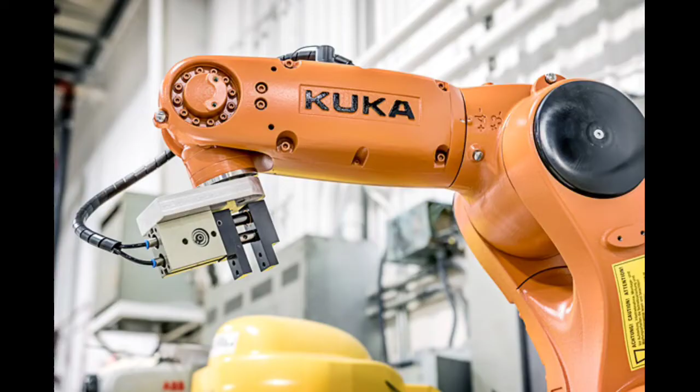Let's continue from the manual mode. Manual mode is the mode for setup work. Setup work is all the tasks that have to be carried out on the industrial robot to enable automatic operation. Setup work includes jog mode, teach, programming, program verification. The following must be taken into consideration in manual mode.

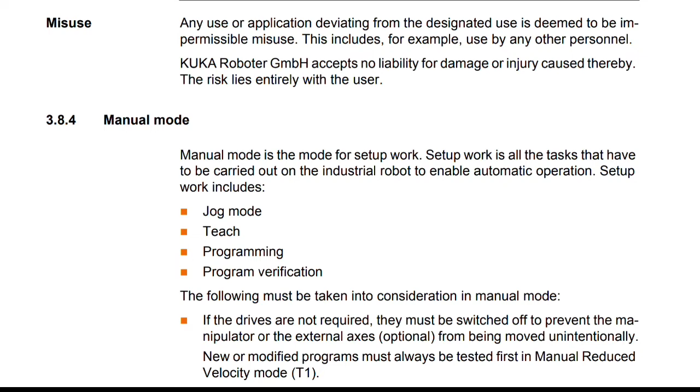If the drives are not required, they must be switched off to prevent the manipulator or the external axis from being moved unintentionally. New or modified programs must always be tested first in manual reduced velocity mode T1. The manipulator, tooling or external axis must never touch or project beyond the safety fence.

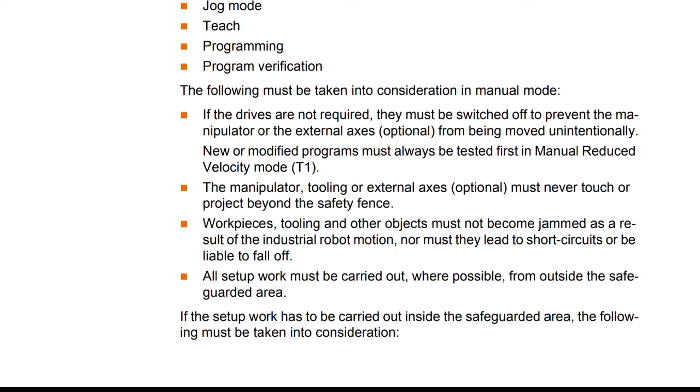Workpieces, tooling and other objects must not become jammed in industrial robot motion, nor must they lead to short circuits or be liable to fall off. All setup work must be carried out where possible from outside the safeguarded area. If the setup work has to be carried out inside the safeguarded area, the following must be taken into consideration.

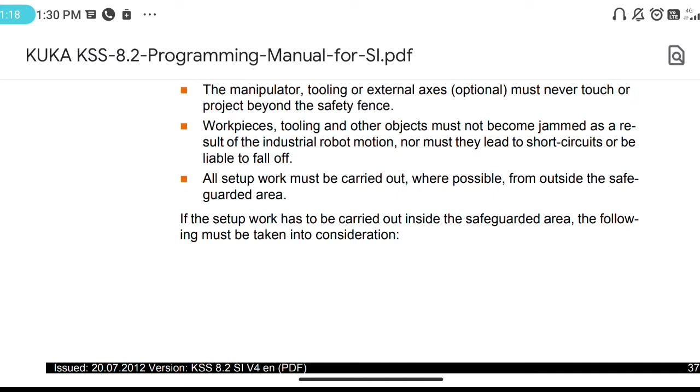In manual reduced velocity mode T1, if it can be avoided, there must be no other persons inside the safeguarded area. If it is necessary for there to be several persons inside the safeguarded area, the following must be observed. Each person must have an enabling device. All persons must have an unimpeded view of the industrial robot. Eye contact between all persons must be possible at all times. The operator must be so positioned that he can see into the danger area and get out of harm's way.

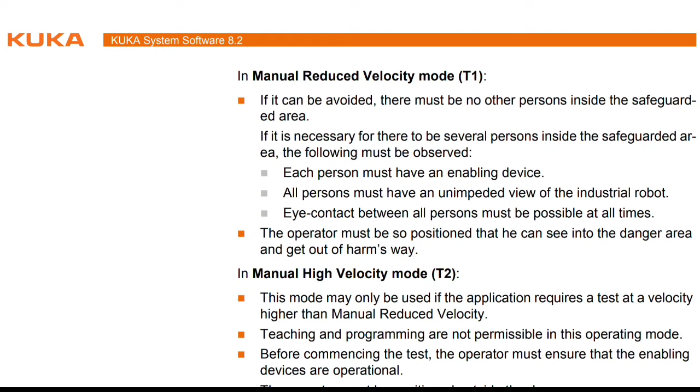In manual high velocity mode T2, this mode may only be used if the application requires a test at a velocity higher than manual reduced velocity. Teaching and programming are not permissible in this operating mode. Before commencing the test, the operator must ensure that the enabling devices are operational. The operator must be positioned outside the danger zone. There must be no other persons inside the safeguarded area. It is the responsibility of the operator to ensure this.

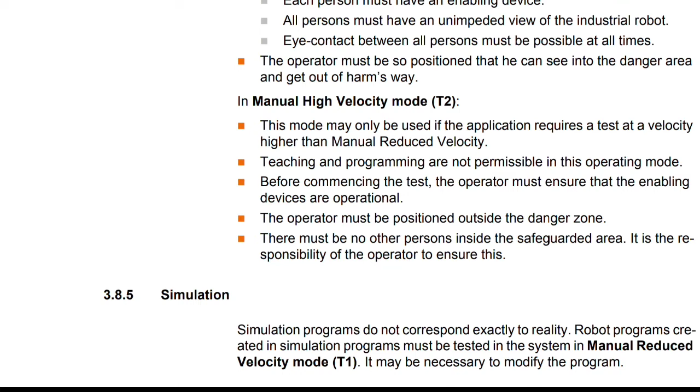Simulation. Simulation programs do not correspond exactly to reality. Robot programs created in simulation programs must be tested in the system in manual reduced velocity mode T1. It may be necessary to modify the program.

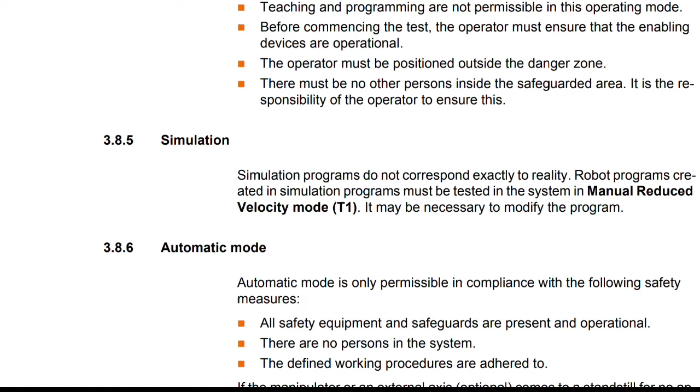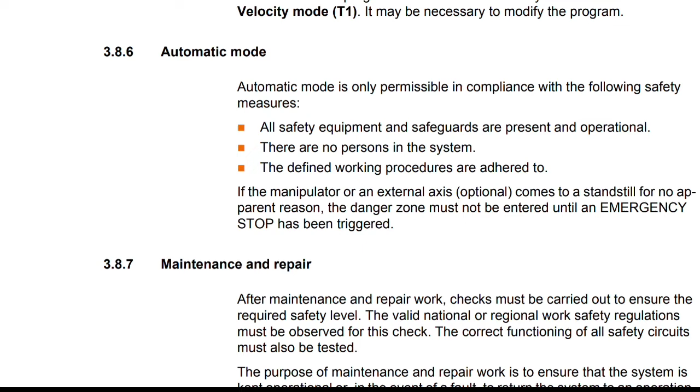Automatic mode. Automatic mode is only permissible in compliance with the following safety measures. All safety equipment and safeguards are present and operational. There are no persons in the system. The defined working procedures are adhered to. If the manipulator or an external axis comes to a standstill for no apparent reason, the danger zone must not be entered until an emergency stop has been triggered.

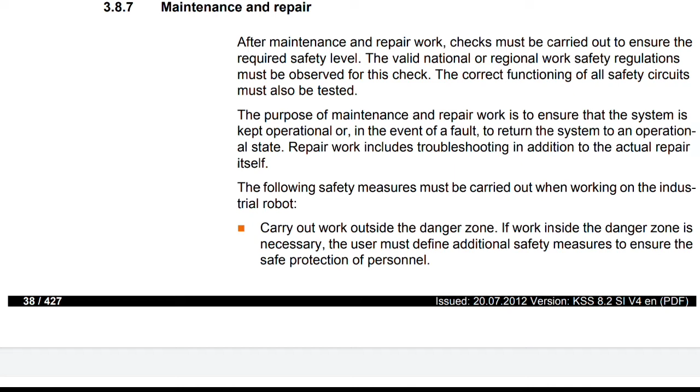Maintenance and repair. After maintenance and repair work, checks must be carried out to ensure the required safety level. The valid national or regional work safety regulations must be observed for this check. The correct functioning of all safety circuits must also be tested. The purpose of maintenance and repair work is to ensure that the system is kept operational, or in the event of a fault, to return the system to an operational state. Repair work includes troubleshooting in addition to the actual repair itself.

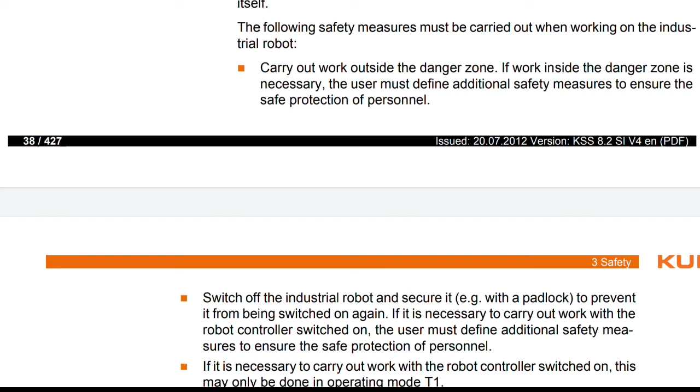The following safety measures must be carried out when working on the industrial robot. Carry out work outside the danger zone. If work inside the danger zone is necessary, the user must define additional safety measures to ensure the safe protection of personnel. Switch off the industrial robot and secure it to prevent it from being switched on again. If it is necessary to carry out work with the robot controller switched on, the user must define additional safety measures to ensure the safe protection of personnel.

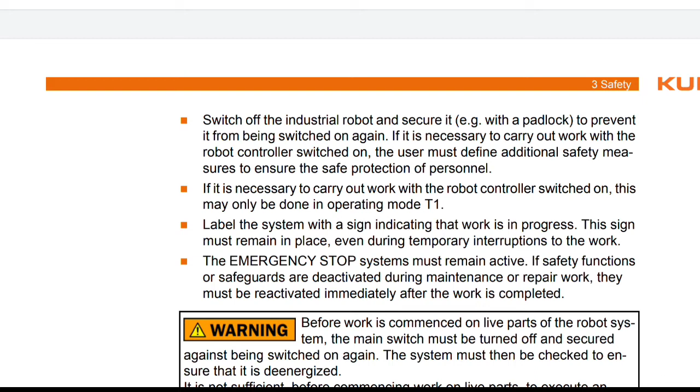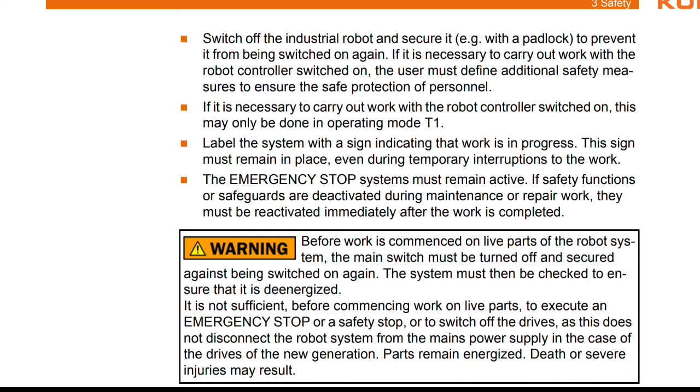If it is necessary to carry out work with the robot controller switched on, this may only be done in operating mode T1. Label the system with a sign indicating that the work is in progress. This sign must remain in place even during temporary interruptions to the work. The emergency stop systems must remain active. If safety functions or safeguards are deactivated during maintenance or repair work, they must be reactivated immediately after the work is complete.

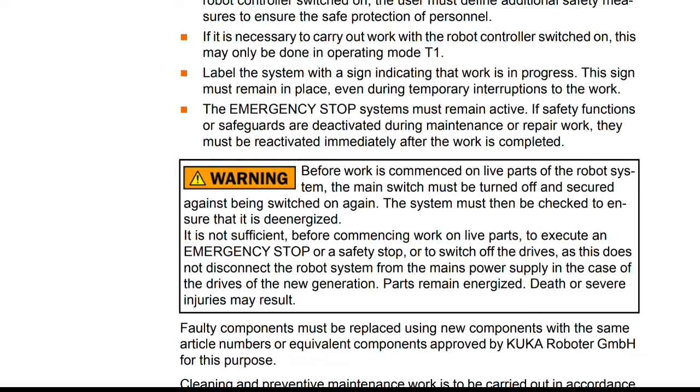Warning: before work is commenced on live parts of the robot system, the main switch must be turned off and secured against being switched on again. The system must then be checked to ensure that it is de-energized. It is not sufficient before commencing work on live parts to execute an emergency stop or a safety stop, or to switch off the drives, as this does not disconnect the robot system from the mains power supply in the case of the drives of the new generation. Parts remain energized. Death or severe injuries may result.

Faulty components must be replaced using new components with the same article numbers or equivalent components approved by KUKA Roboter GmbH for this purpose. Cleaning and preventive maintenance work is to be carried out in accordance with the operating instructions.

Robot controller. Even when the robot controller is switched off, parts connected to peripheral devices may still carry voltage. The external power sources must therefore be switched off if work is to be carried out on the robot controller. The ESD regulations must be adhered to when working on components in the robot controller. Voltages in excess of 50 volts can be present in various components for several minutes after the robot controller has been switched off. To prevent life-threatening injuries, no work may be carried out on the industrial robot in this time. Water and dust must be prevented from entering the robot controller.